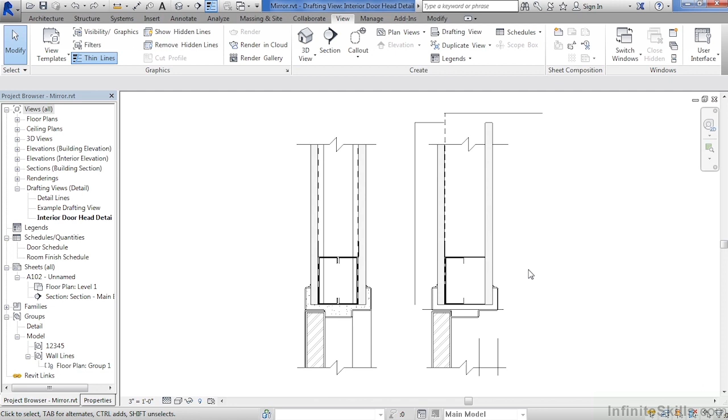On the left-hand side, we have the finished detail, and that's how this detail on the right should look when it's completed. If we zoom in toward the bottom by spinning the wheel on the mouse, we can see that we have a C channel and then another C channel, and that's a condition we need to have over on the right-hand side.

To do this, we will use the mirror command. Start by selecting the C channel, then move your cursor up. There are actually two different kinds of mirror commands available to us. The first one won't actually be the correct mirror command for this condition, but I do want to illustrate it for you - that's the Mirror Pick Axis tool.

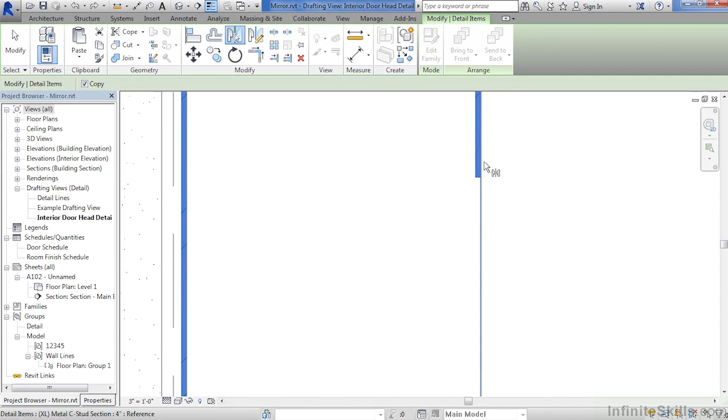Select on Mirror Pick Axis, move your cursor over to the outer face of this C channel, and click. That outer face became the axis point for that mirror, and we can see that it's made an exact copy of that object over on the other side.

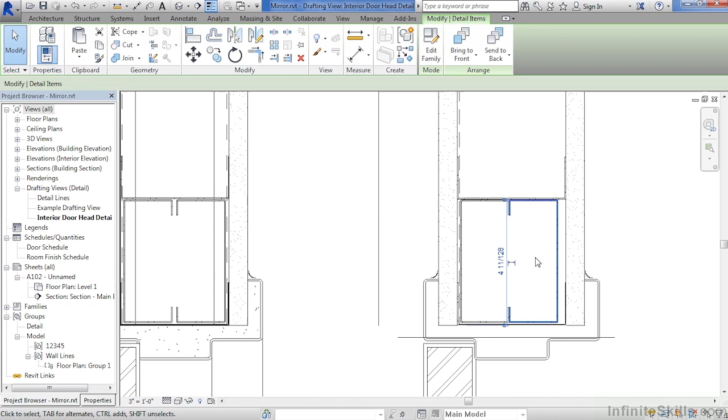Unfortunately, though, it's not spaced appropriately. If you look over on the left-hand side, we can see that there's a nice gap between these two. At this point, if we wanted to use the move command, we could, but for this example, I would like to use the other kind of mirror command to correctly mirror this to the other side.

If it's not already highlighted, make sure to select that channel we just made, then click the delete key on the keyboard to get rid of it. Now, let's try the other mirror command.

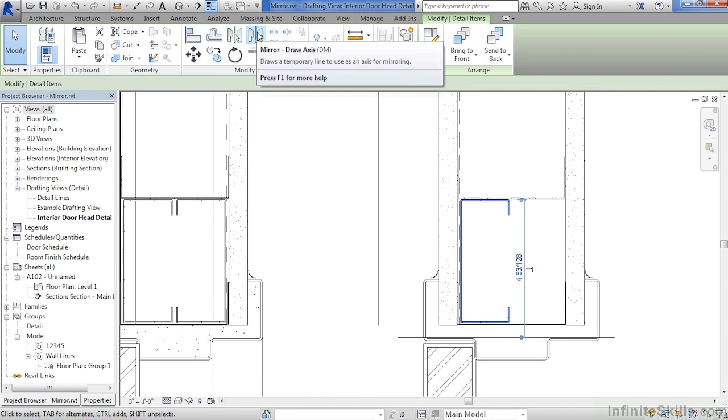Once again, select on that channel, move your cursor up, and now let's select Mirror Draw Axis. Zoom in here toward the bottom by spinning the wheel on your mouse. Then along the face of this channel that goes across the bottom, move your cursor along until you see that triangular shape there in the middle of the object.

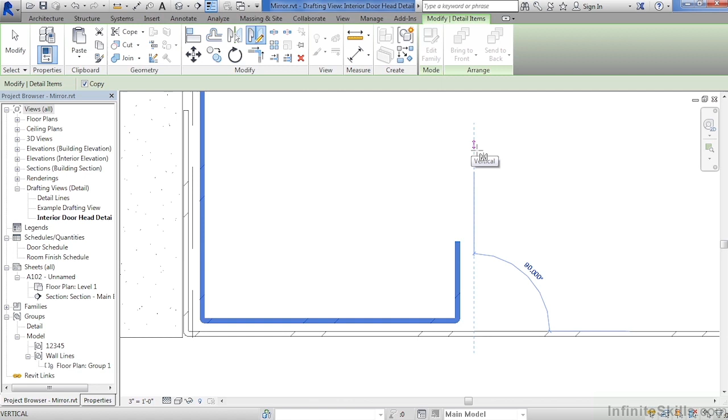Once it's there, click and draw a line straight up. This means that we'll mirror across this line that we're drawing straight up. Click again once you have this dashed line going up, and we can see it's mirrored it equally from one side over to the other side.

And if we zoom out, we can now see that that object has in fact been mirrored from the left over to the right.